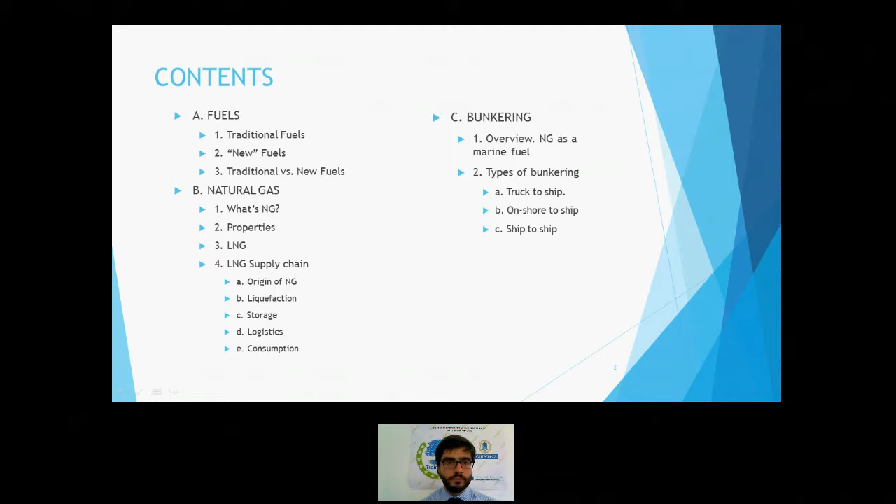Well, the first block is fuels. First of all, what is a fuel? A fuel is a material that has the capacity to store an amount of energy, and this energy can be used for work or as heat energy. It is important because the fuel is the origin of the energy that it stores. It is the reason why electrical energy is not a fuel, because electricity is not the source of the energy, but only the way to transport it.

We can find fuel in various states - they can be solid, liquid, or gaseous. Traditional solid fuels are coal and wood. Liquid fuels are oil derivatives. And the most common gaseous fuels are natural gas or hydrogen.

First of all, a little history about fuels. People began to use fuels basically for heating ourselves and for cooking our food, and the first fuel ever used was wood to make fire. But with the Industrial Revolution and the appearance of the steam engine, coal became the main fuel used for transport and for industrial applications.

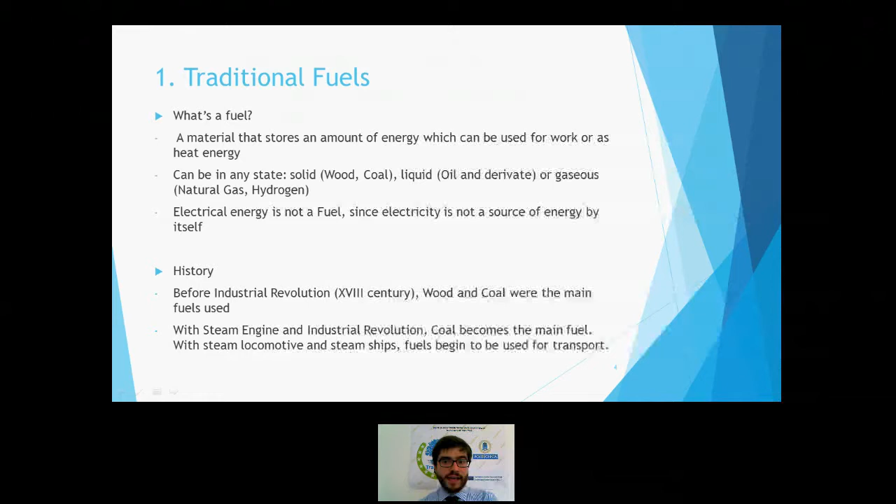The steam engine - with the steam engine appeared the steam locomotive and the steam ships, and this was the way that coal began to be used as a transport fuel. And then, mainly due to its flexibility and the technical development that began to exist, oil-derived fuels were adopted instead of coal for some industrial processes and mainly for transport.

So basically, the way that fuels have followed since the origin to nowadays is shown in these pictures. First, wood for cooking and heating ourselves, then coal in transport, in steam locomotives and steam ships, and finally oil-derived fuels.

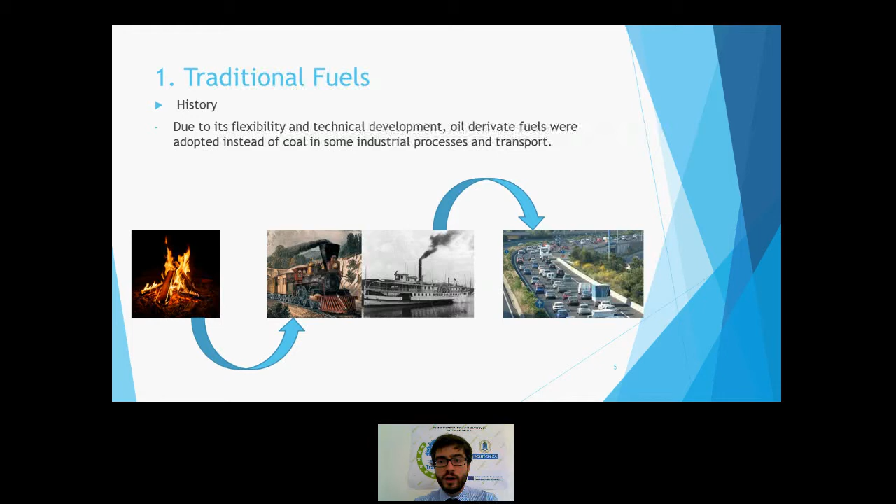Well, first of all, traditional fuels. The main traditional fuels that we know nowadays are diesel, gasoline, and fuel oil. In this table, we can see the energy content, and we can see that there is not a big difference between the most energy powerful and the lowest. Nowadays, these three traditional fuels are the three oil derivatives, and they come from distilling oil.

Its supply, of course, depends on the rate of extraction of oil. In 2014, global consumption of oil was almost 89 million barrels per day, with a proved reserve of 1,700,000 million barrels. It makes a global ratio of reserve production of almost 53 years, meaning that if we keep consuming oil at the rate we have during the last year with the proved reserves we know nowadays, we still have oil for 53 more years.

The main producers are Middle East countries, USA, and Russia, while the main reserves are located in Venezuela, the Middle East, and Canada. Venezuela is the biggest reserve of oil in the world.

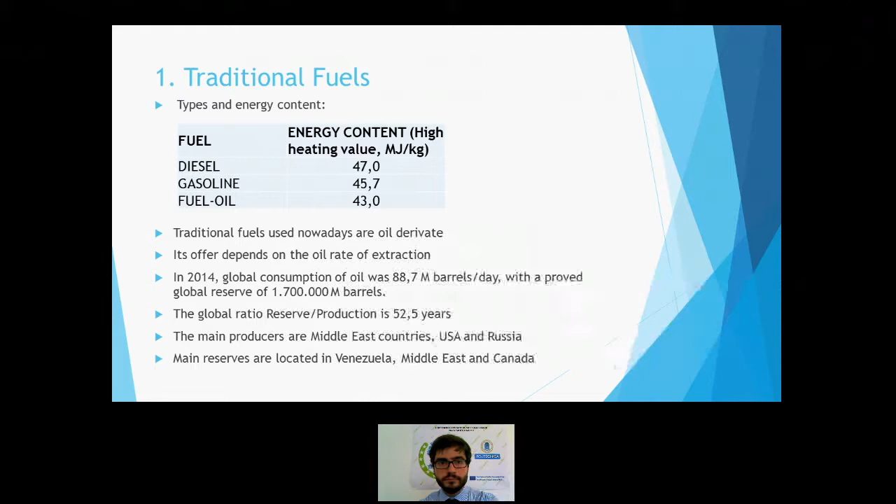And on the other hand, we have new fuel. What's called a new fuel? New fuels are actually not anything new - they have been known for decades. But new fuels are those that nowadays are beginning to be used for transport, mainly for transport. The main purpose of their development is to find cleaner and cheaper fuels, alternatives to the traditional fuels which are diesel, gasoline, and fuel oil.

Well, the types of new fuels we know nowadays. The first one is ethanol, which is produced from plant material. Usually it is used mixed with gasoline, with a mix ratio that varies from 10% to 83%. It reduces dramatically the mixed energy content, and not all gasoline engines tolerate high ethanol rates. So it has some disadvantages.

The second one is biodiesel. It is produced from vegetable oils and animal fats. It can be used by itself or mixed with diesel, and not all diesel engines tolerate high biodiesel rates, as happened with ethanol. The third is natural gas.

Natural gas, as I said before, is not actually new, but it is beginning to be used nowadays for transport. It comes from wells. One of the main advantages is that it reduces dramatically the air pollution rates. Diesel or gasoline engines can be adapted to natural gas, but they can also keep using their original fuel, and prices are lower than diesel and gasoline - another important advantage.

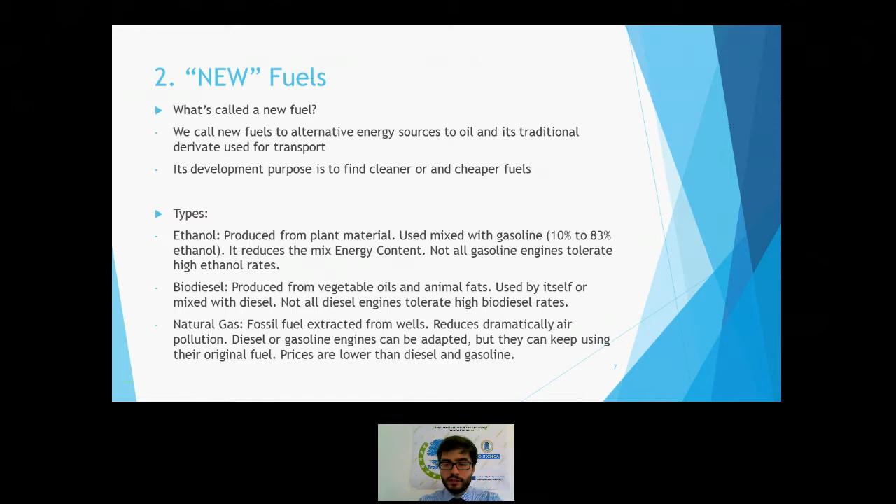The last one is LPG. It is also an oil derivative, but it hasn't been used for years for transport, so it is considered also a new fuel. It reduces some harmful emissions, not as much as natural gas does, but it still reduces some. Its price is lower than diesel, which is its main advantage.

In this table, we can see the energy content of every new fuel. Ethanol has a lower energy content than the other three, while the other three are more or less similar, though not the same—the difference between the most and the least is about 20%.

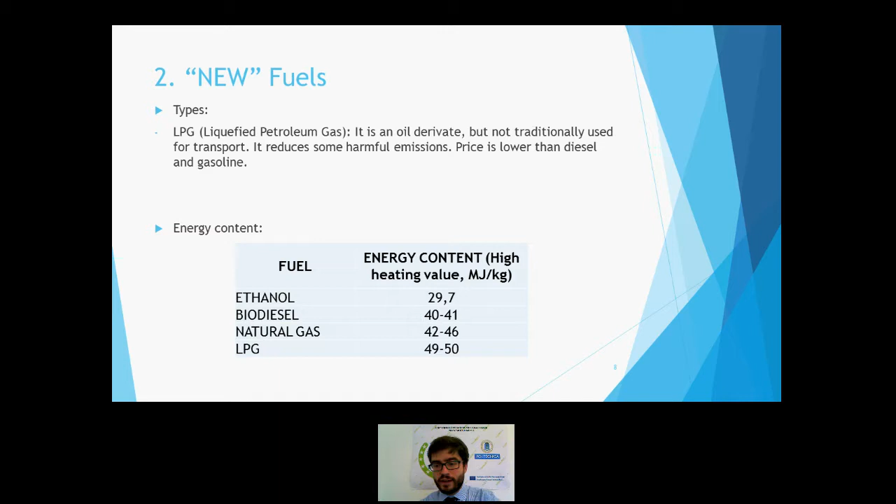Biofuel production, including bioethanol and biodiesel, in 2014 was almost 71 million tons of oil equivalent, while oil production in the same year was 4,220 million tons. That makes bio-oil production only 1.68% compared with oil production. It's not really representative nowadays.

Gas production in the same year was 3,127 million tons, and its reserve-to-production ratio is 187 years. This is important because it means that, keeping our consumption ratio, we still have 187 years of gas, which compared to oil's ratio of around 52.5 years, is much higher.

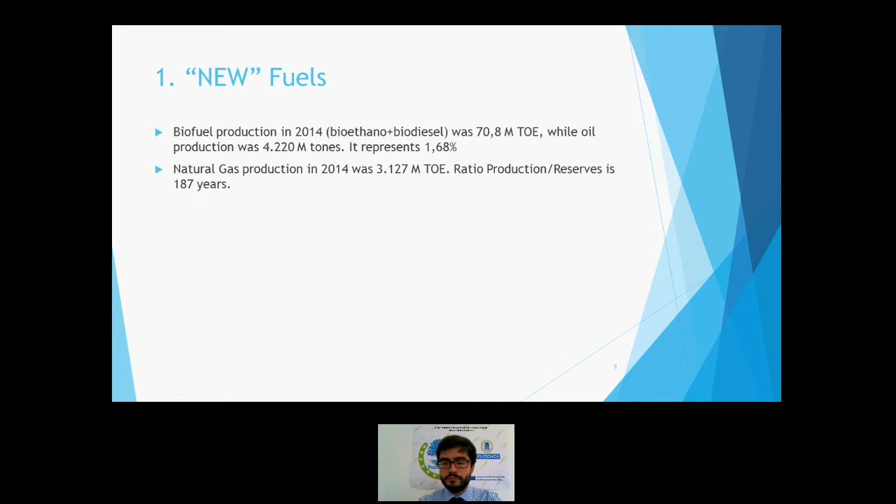Comparing new fuels versus traditional fuels, there are advantages and disadvantages to each type. On one hand, traditional fuels have technology that is already developed, which is an important advantage. There are lots of engines, cars, and truck models that some brands offer nowadays at really competitive prices. Another advantage is their versatility and supply.

There are lots of supply points where we can fuel our diesel or gasoline car. However, the disadvantages are that pollution levels are generally higher than new fuels, costs are beginning to increase and are usually higher than new fuels, and reserves are low and getting lower every year.

On the other hand, we have new fuels, which are generally cleaner. Their pollution levels are lower, their prices are generally also lower, and the reserves we still have of these fuels are larger, bigger. Some of them are actually renewable.

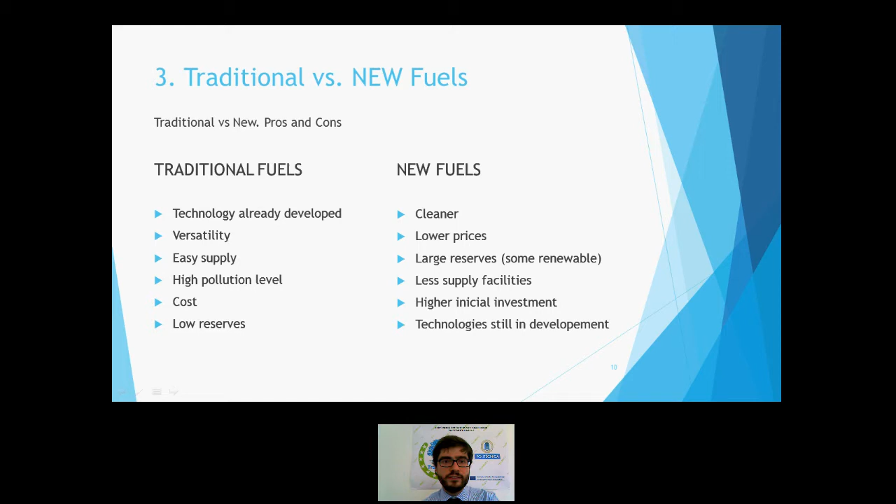Let's study a case where we compare a traditional diesel-fueled truck with an LNG natural gas fuel truck by Iveco, the Iveco Stralis. The assumptions for the case study are as follows: the diesel cost is €1.08 per liter.

That's the diesel cost of nowadays. The LNG cost will be 78 cents per kilo. The initial investment will be €21,000, which is the real investment. Let's assume that this truck will travel 120,000 kilometers per year.

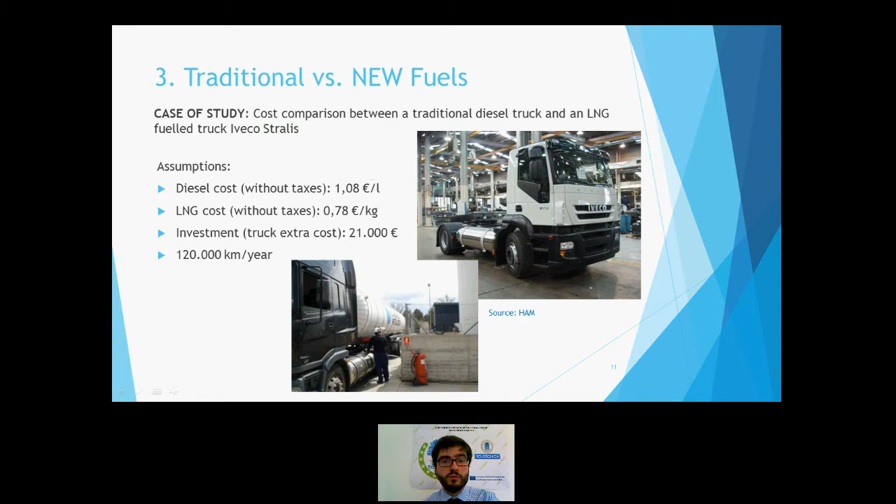Well, with these assumptions, we see that the savings every year are almost 16,000 euros, and the period of amortization is less than 1.5 years. This is important because it means it's really a good investment to use LNG trucks, and that's why nowadays there are lots of companies planning to switch their fuel from diesel to LNG.

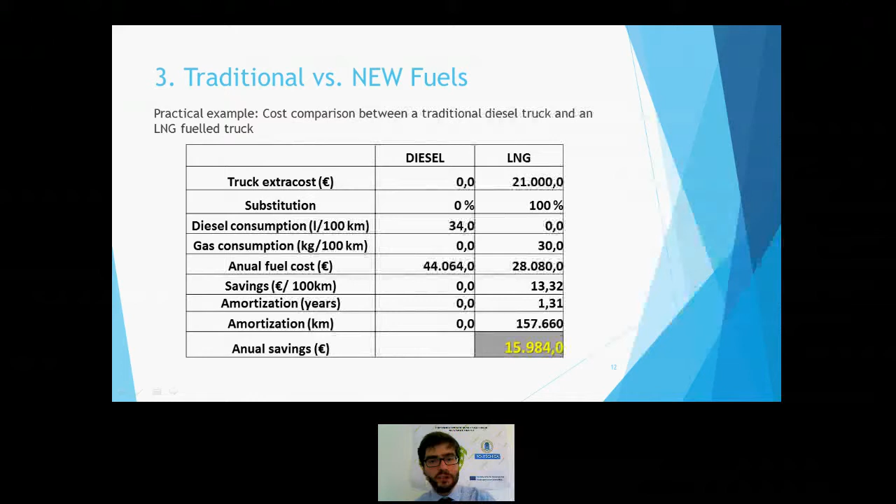Now let's talk a little about natural gas in general. First of all, what is natural gas? Natural gas is not actually a single gas—it is a mix of different gases whose principal component is methane. Its composition depends basically on the country of origin of the natural gas.

In this table we have three different examples: the first is from Algeria, the second is from Libya, and the third is from Qatar. These data are taken from Sedigas, and we can see how the composition of natural gas varies from one well to another. Basically, methane makes up at least 83% to 87% of the composition, while ethane, propane, butane, and other heavy hydrocarbons make up less than 10-12%.

There is also a small quantity of nitrogen, and its energy content in megajoules per kilo, while not exactly the same, is quite similar depending on the well it comes from.

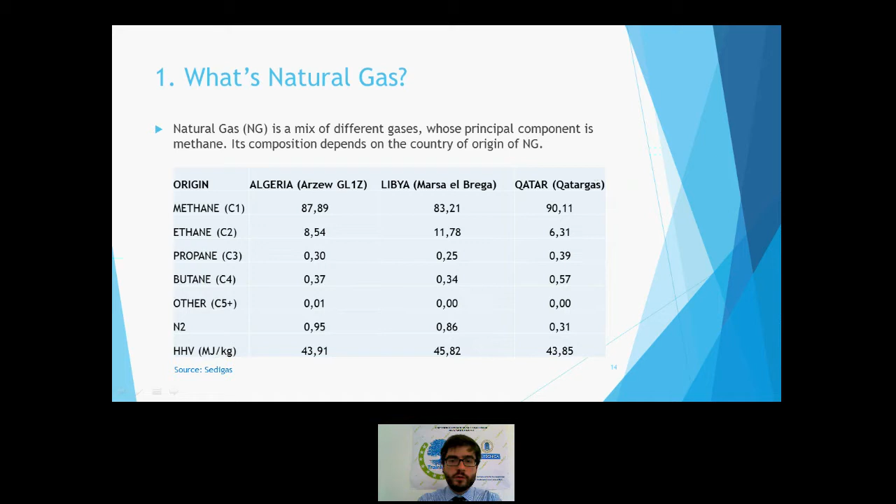Natural gas is extracted from wells, and originally it is found in gaseous state. Transport of the gas can be performed by pipeline in gaseous state, or by ship and trucks, but in that case it must be in liquid state. At normal conditions, which is considered 0 degrees and 1 atmosphere of pressure, natural gas is found in gaseous state. This is more or less the conditions in which it is found in nature.

But it can be liquefied by chilling it down to cryogenic temperatures, which means going to more or less minus 160 degrees at 1 atmosphere. At this pressure of 1 atmosphere, liquefied natural gas specific volume is approximately 600 times smaller than gaseous natural gas. This is so important, and this is the main reason why it is so interesting to liquefy natural gas.

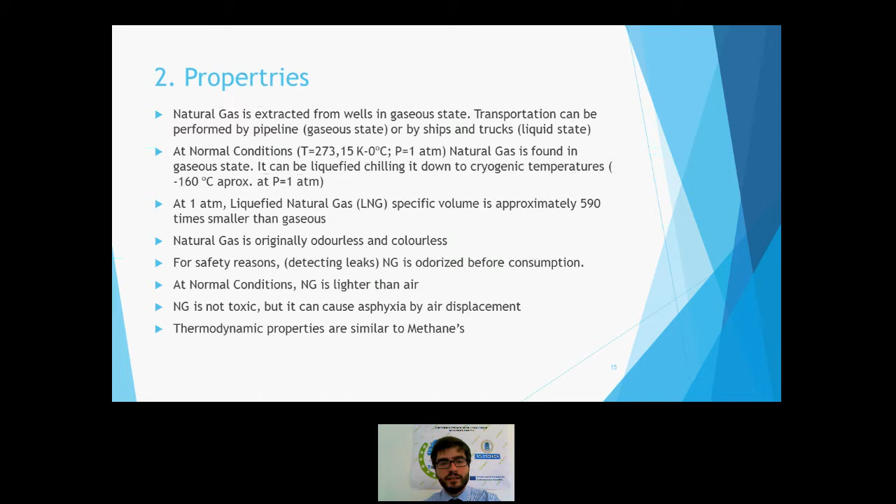Originally, natural gas is odorless and colorless, but for safety reasons, basically for detecting leaks, natural gas is odorized before consumption. At normal conditions, natural gas is lighter than air. It is not toxic, but being not toxic, it can cause asphyxia by air displacement, taking the place that air took. Its thermodynamic properties are similar to methane, so when we have to make calculations about the processes of natural gas, we usually take methane's properties.

Then we have LNG, which is nothing more than liquefied natural gas. Basically the material is the same, but it's liquefied, so it changes its state. Why do we liquefy natural gas? Basically because the density, as I said before, is approximately 600 times higher than natural gas, so it is the only economical way to transport it large distances in ships or trucks. LNG also permits storing large amounts of energy in limited space. In 2014, one third of the international natural gas trading was made by LNG.

LNG properties as a fuel are the same as natural gas, but it is a liquid, so it is an odorless and transparent liquid. Its temperature generally varies from minus 160 to minus 100 at normal operating pressures. Its approximate density is 450 kilos per cubic meter, but it also depends on the temperature and its composition. LNG vaporizes at atmospheric conditions.

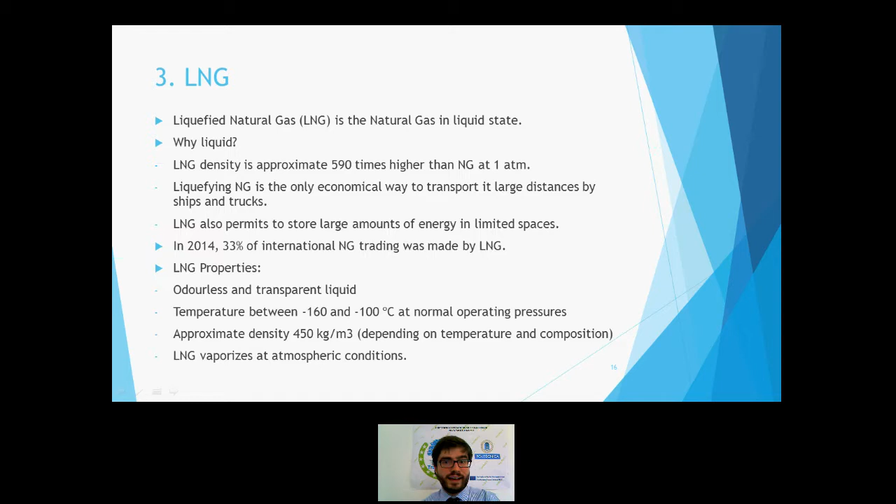LNG combustion, like natural gas, is cleaner than oil derivatives. It generates a minimum amount of sulfur dioxide and nitrous oxides, and carbon dioxide emissions are also smaller than oil-derived fuels, more or less 20 and 10 percent lower.

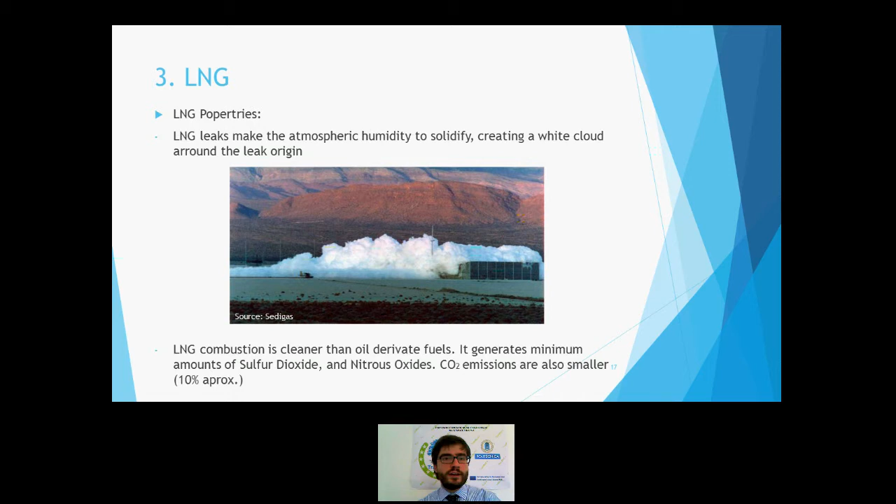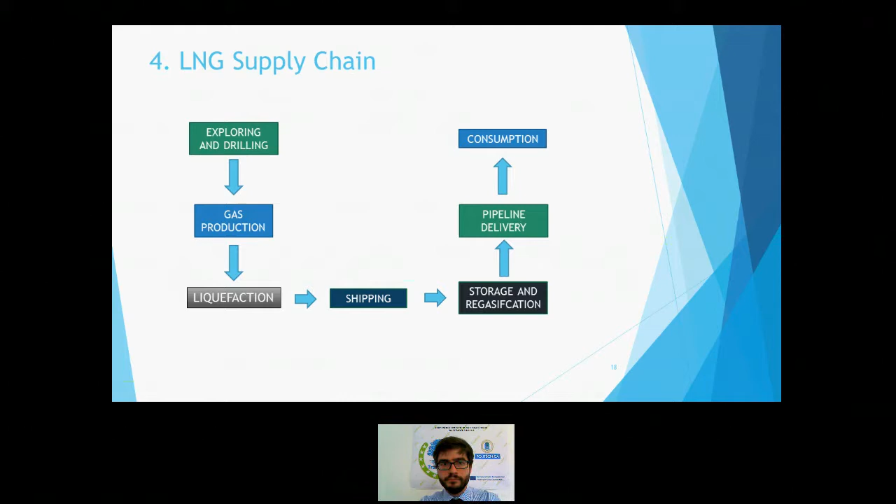As we said before, natural gas is extracted from wells. These wells can contain only gas, or they can also contain oil. When the well from which the natural gas comes also contains oil, we say that it is associated natural gas, and this well is called an associated well. When the well contains only gas, we call this gas unassociated natural gas.

Depending basically on logistic and technical conditions - the location of the well, the complete amount of gas located in it, the availability of treatment facilities, and other conditions - natural gas from associated and unassociated wells can be or not economically used. Where it cannot be economically used, sometimes it's burned off in flares in the same field, and sometimes it is reinjected, waiting for conditions to change, basically waiting for the price to become higher.

Natural gas extracted sometimes contains significant quantities of heavy hydrocarbons, and they are almost always removed from the natural gas for two reasons. The first is economical, because the price of heavy hydrocarbons is higher than natural gas, so it's money. The second is technical: the natural gas liquefaction process does not tolerate high rates of heavy hydrocarbons, so it must be removed if we want to liquefy.

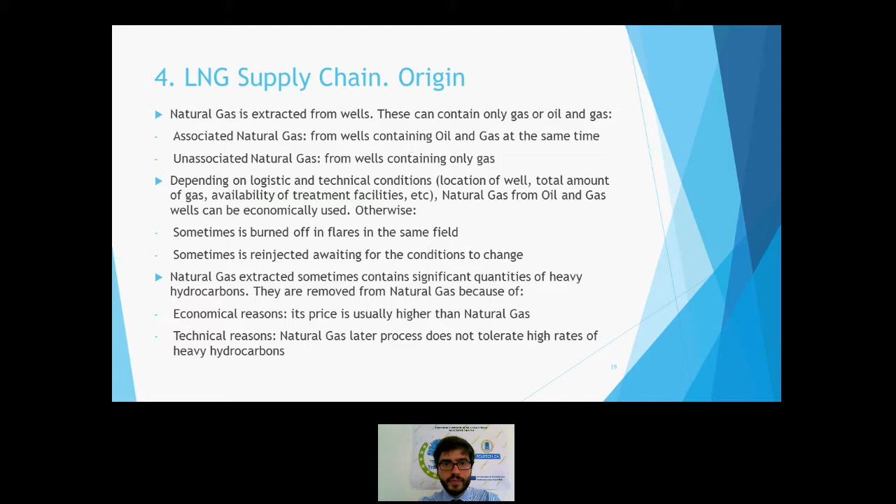When natural gas is transported by pipelines, it must be compressed and sent almost directly to its consumption points. But when natural gas is destined for the LNG market, it's liquefied in a liquefaction plant.

This plant is the place where the gas is liquefied. Its basic parts are the pretreatment, liquefaction system, storage, a loading facility, and generally a power generation plant. There can also be other systems in the same plant, such as cooling water systems, nitrogen production, water treatment, or other auxiliary systems.

The first step, pretreatment, has the objective to remove different things. The first is solid particles, and they are removed because they can cause damage to the plant equipment and to the consumption devices.

The second is mercury, and it is removed because it causes damage to aluminum-made equipment. Then heavy hydrocarbons, if they have not been previously removed, as we said before.

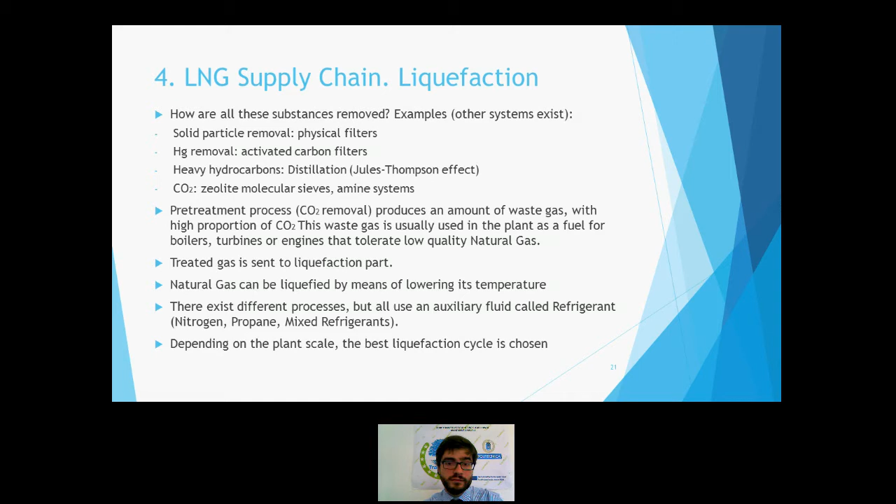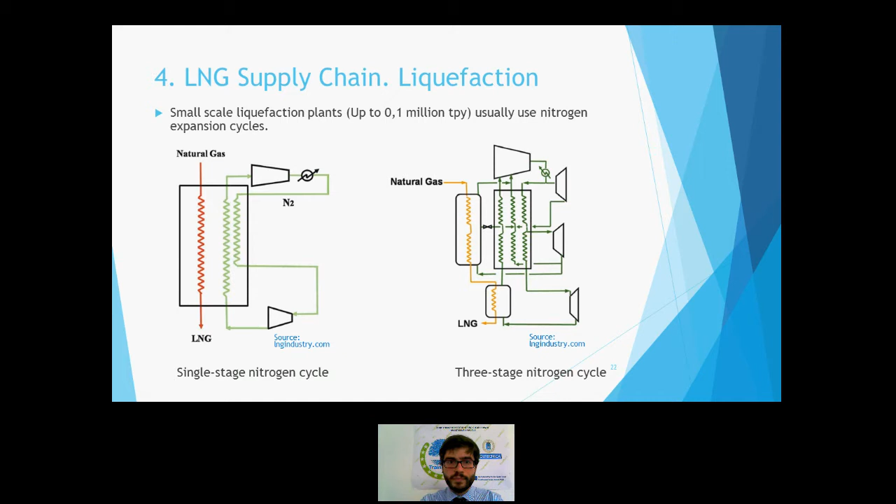Basically, nitrogen is compressed, then it is cooled, and finally expanded, so we dramatically drop its temperature. Then heat is exchanged between the natural gas and the cold nitrogen inside the cold box.

This is how the natural gas is liquefied. As I said before, this compression and expansion of nitrogen can happen in a single stage or in consecutive stages.

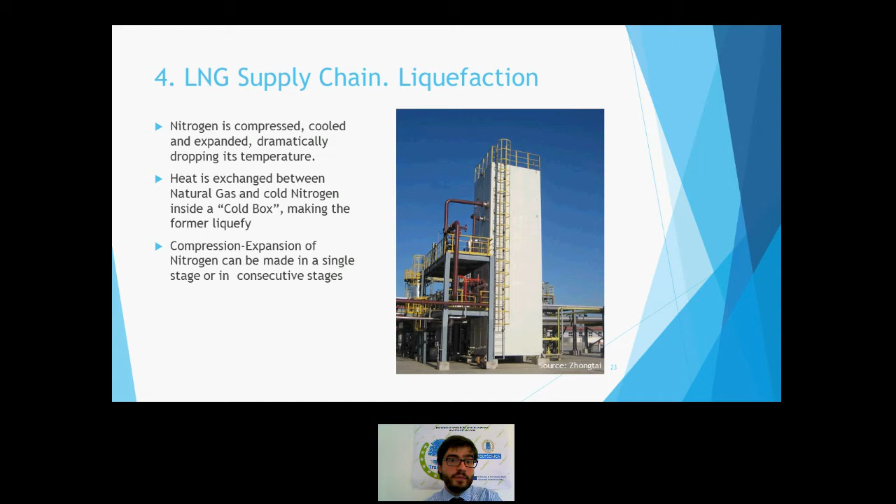The main advantages that these nitrogen cycles offer to owners of plants is that there is only one refrigerant, which makes it simple, and this refrigerant fluid is inert and cheap. Nitrogen can also be easily self-distilled where it is not commercially available, and it is also used in other parts of the plant for other purposes, basically for inertization.

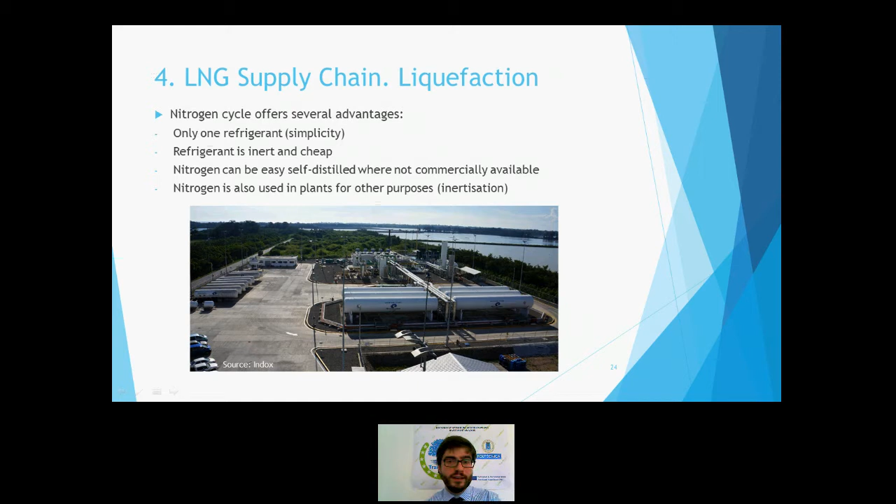On the other hand, large liquefaction plants, 1 million tons per year and bigger, usually use the cascade liquefaction cycle, which implies using more than one refrigerant and more than one stage.

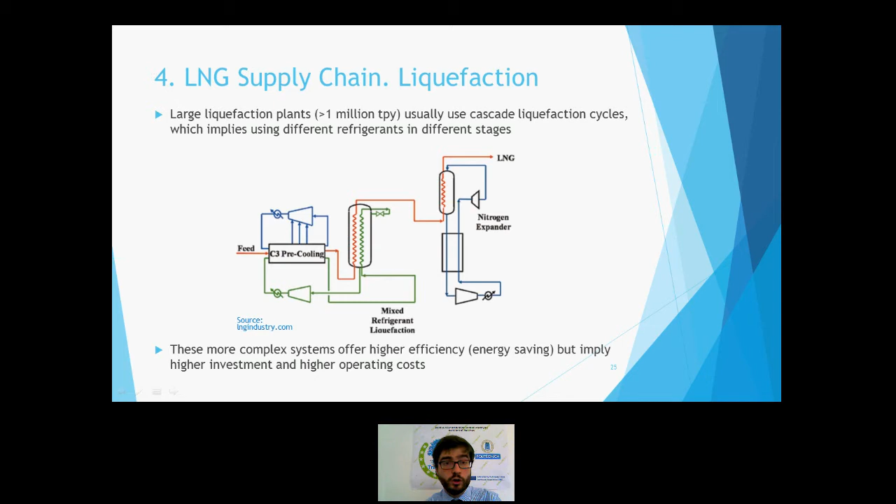Once it's been liquefied, natural gas must be stored before being transported to the consumption points. This storage step must be performed while conserving the LNG under its equilibrium point, so heating must be avoided to prevent boil-off.

The LNG heating is prevented by means of insulation. Basically, tanks and pipes are insulated from the medium, either by covering them with polyurethane foam or by creating a vacuum chamber between them and the medium.

On one hand, polyurethane offers easy performance, versatility, and low cost, but less thermal efficiency. Vacuum insulation is technically more complex than polyurethane insulation, and there is little experience in general performing this kind of insulation. Its cost is higher, but its thermal efficiency is so high.

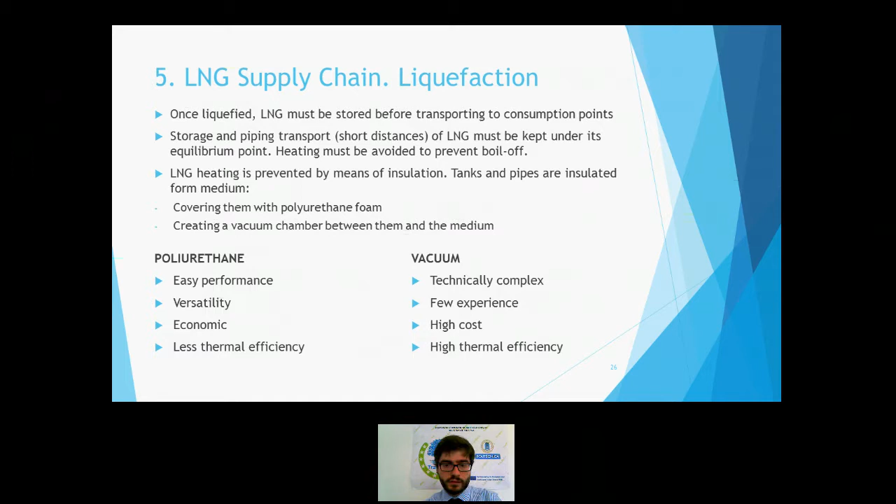Storage is basically performed in cryogenic tanks, which can be pressure tanks or atmospheric tanks. The first kind, pressure tanks, usually cover the range up to 200 cubic meters, and they are almost always vacuum insulated.

They are manufactured at a shop, which means quick assembling on site. Their pressure varies from 5 to 20 bars, basically, which is so useful for some users, implying no need of pumps in some applications. They are used only in small-scale liquefaction plants.

On the other hand, we have atmospheric tanks, which cover the range from 500 cubic meters. They are insulated basically with perlite and foam glass, and they are constructed on site, which implies a longer term of construction.

Its pressures are usually below 0.5 bars, and usually they are used in medium or large scale liquefaction plants and storage and regasification plants.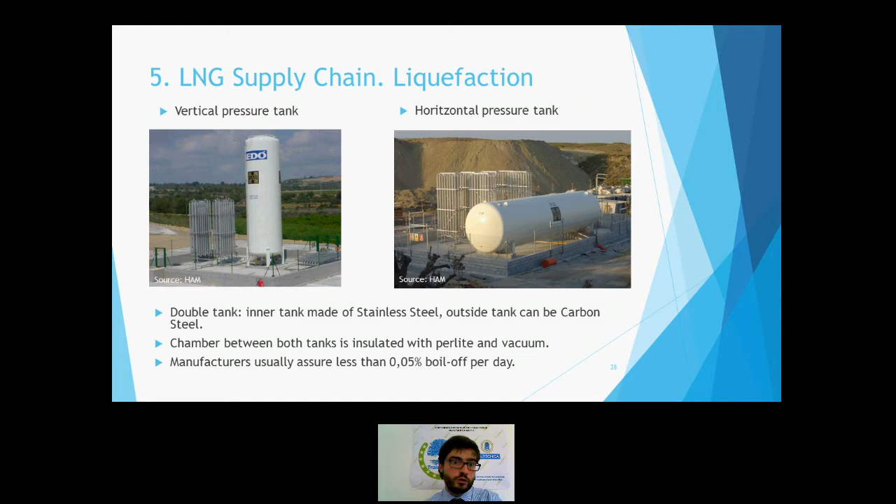And on the other hand, atmospheric tanks also have a double tank. The inner tank is always made of stainless steel, while the outside tank can be made of carbon steel or reinforced concrete. Generally, the bigger ones are made of reinforced concrete, while medium tanks are made of carbon steel. The chamber between both tanks is thicker than in pressure tanks, but it is not vacuum insulated. It is insulated with perlite only, and the bottom and deck are usually insulated with foamglass.

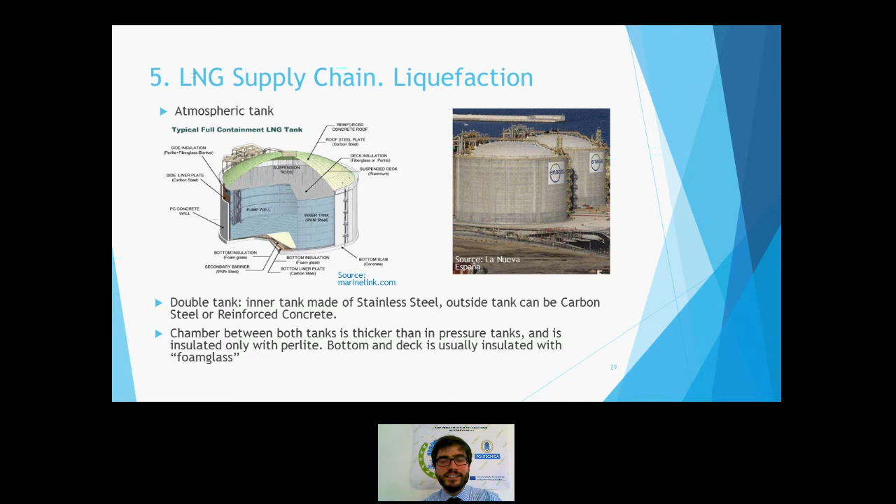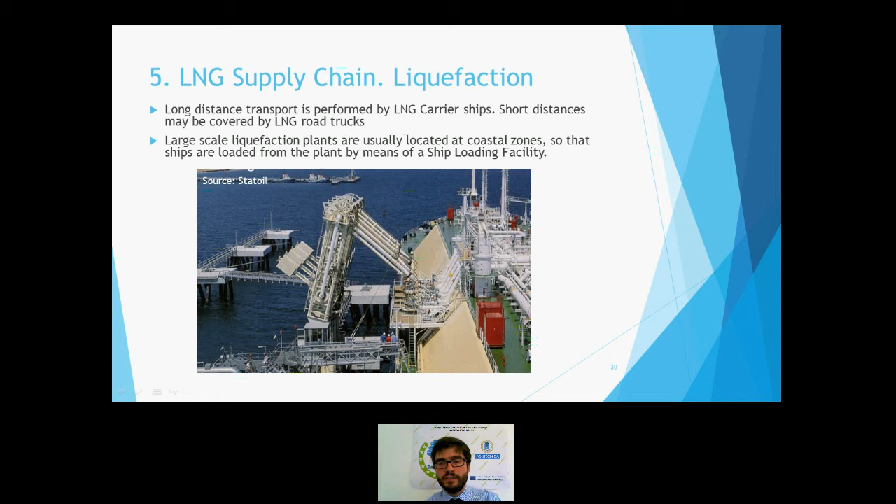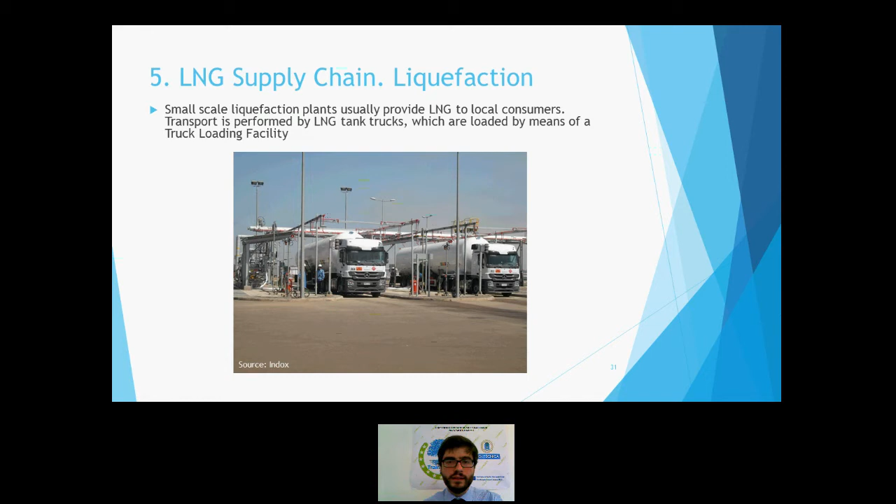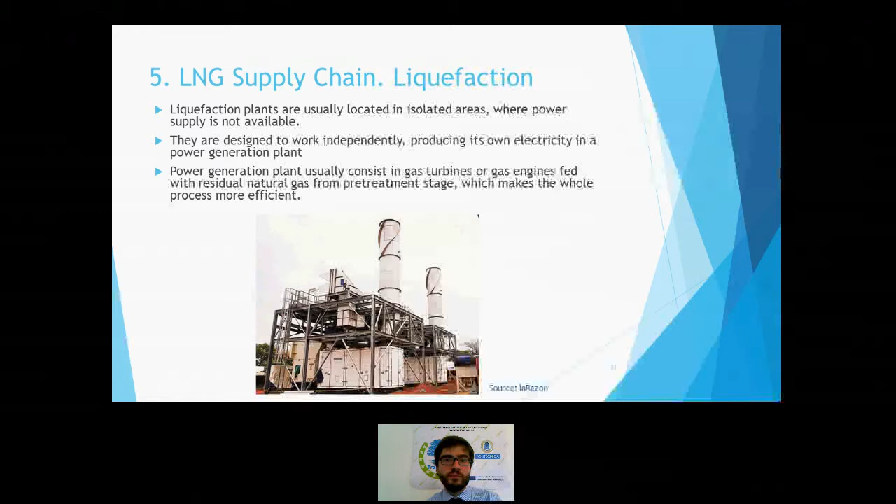Long distance transport of LNG is performed basically by means of LNG carrier vessels, whose capacity usually is up to 260,000 cubic meters. There exist different designs for these carrier vessels, but they all can be classified into two big groups. The first is the self-supporting tank system, which consists of a ship containing a series of spherical or prismatic tanks that are insulated and supported by the structure of the ship, but are independent of the vessel hull.

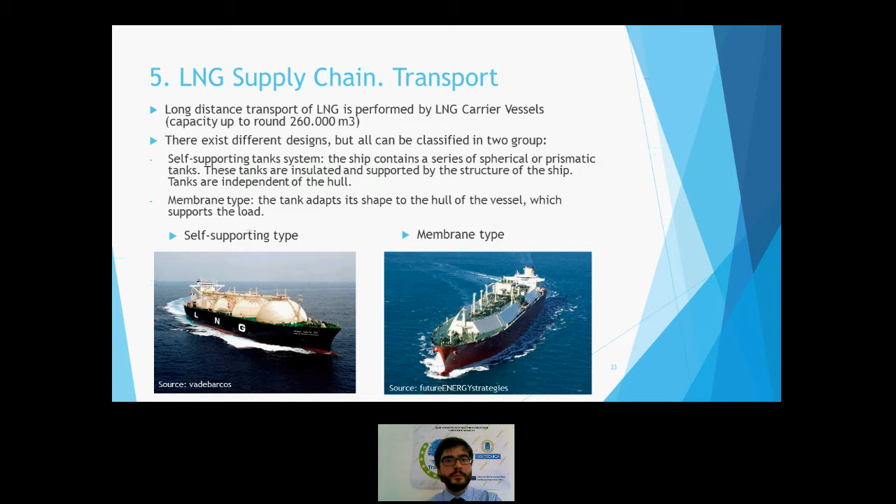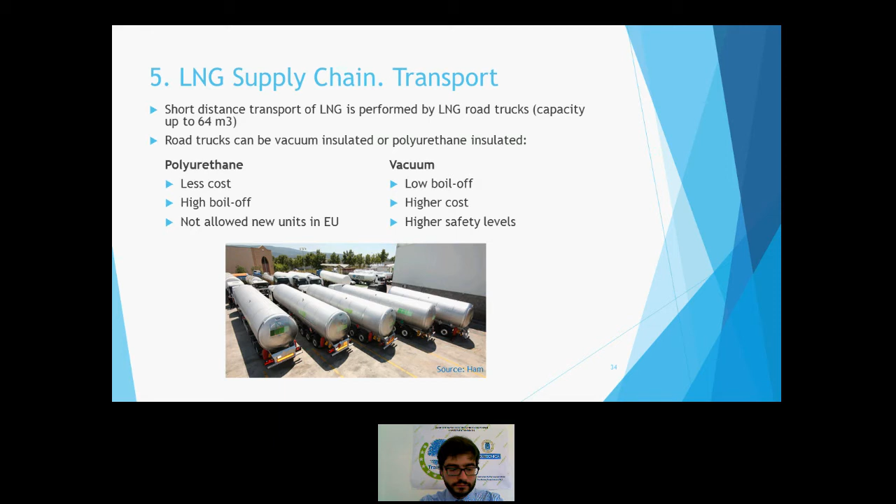The step once the LNG has been transported is regasification. So LNG vessels are received at storage or regasification plants, which are located basically in importer countries. Regasification plants receive, store, and regasify LNG, and natural gas, once it's in gas state again, is transported by pipeline to its final consumer. Part of the LNG received at the regasification plant is sold in liquid state and transported by LNG road trucks again.

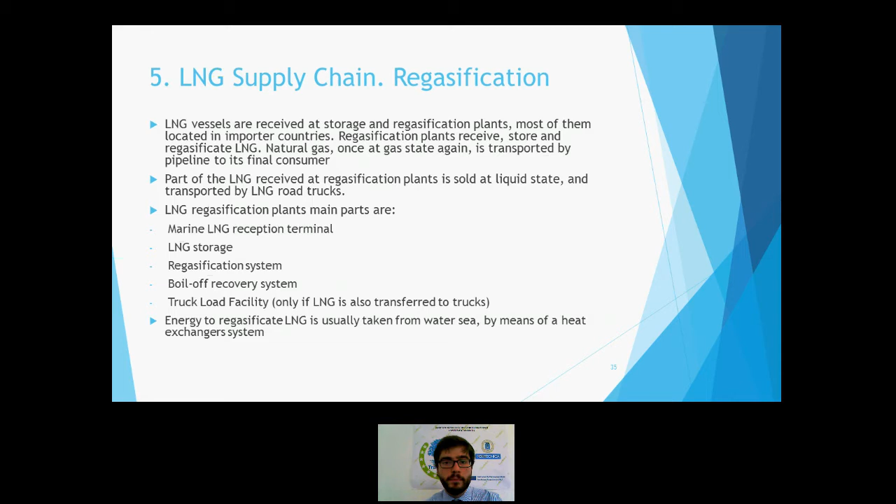In an LNG regasification plant, its main parts are the reception terminal of the LNG, the storage devices, which are basically atmospheric tanks, the regasification system, a boil-off recovery system, and if part of the LNG is sold or transferred to trucks, a truck loading facility. Energy needed for regasification of the LNG is usually taken from sea water by means of a heat exchanger system. And in this picture, we can see a regasification plant whose most characteristic feature is its big atmospheric tank.

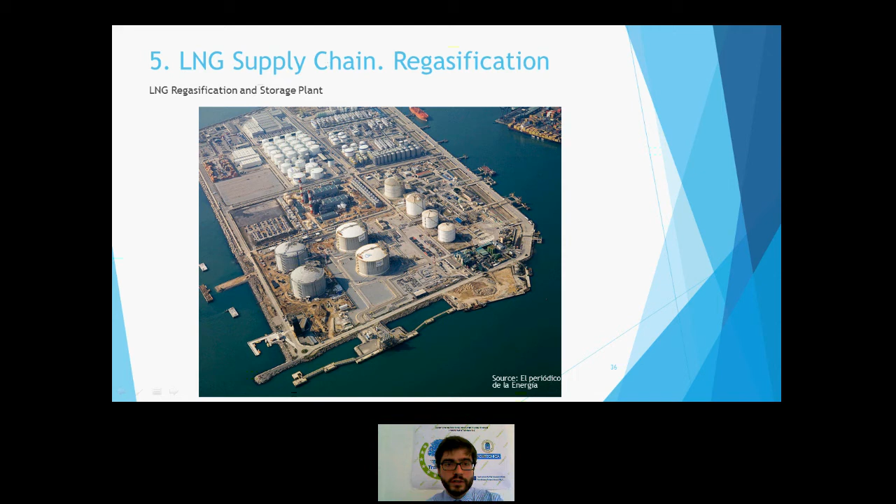And here we can see the European LNG system, storage and regasification system. In green color, we see the existing facilities, while in red we can see those that are under construction or committed right now, and in yellow we see those that are still planning or under study.

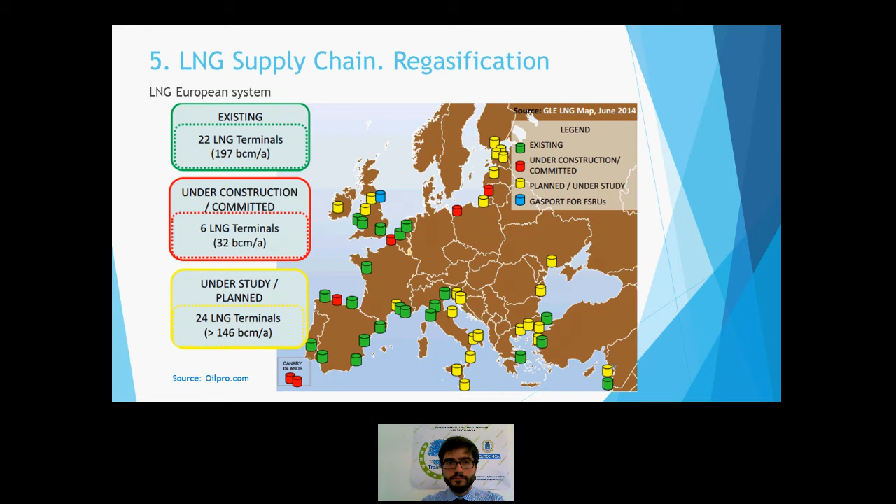This was for LNG which was transported by vessel, but the LNG that is transported in road trucks is employed basically in satellite regasification plants or other small-scale consumption facilities. An LNG satellite regasification plant is basically a small facility whose purpose is regasifying LNG to feed small-scale consumption points. Generally, satellite plants feed industries or isolated population centers not covered by pipeline.

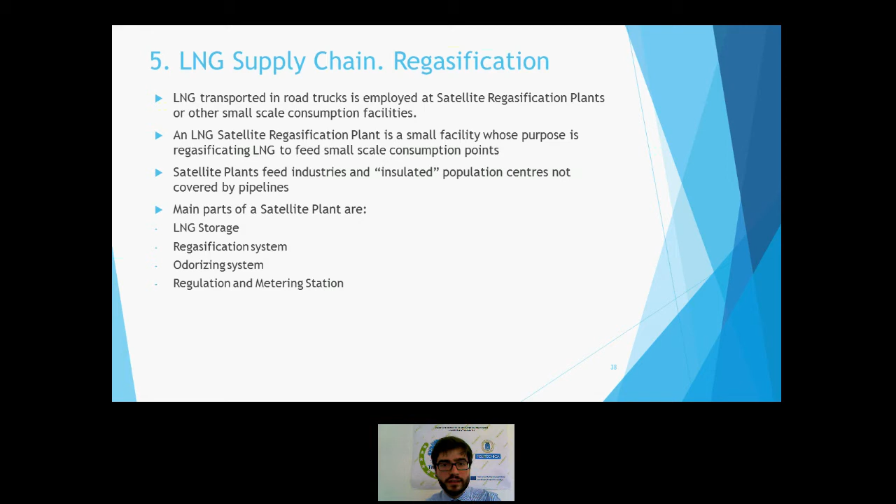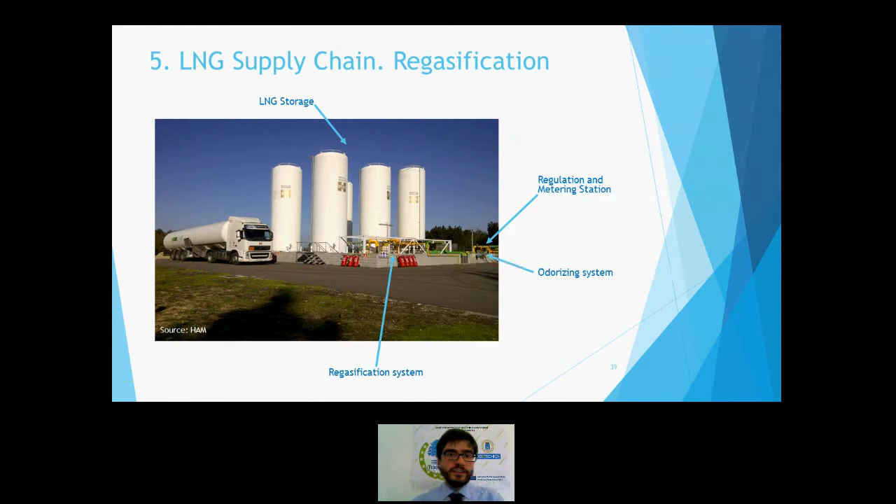The storage of the LNG at satellite plants is performed basically by pressure vertical or horizontal vacuum insulated tanks. The number and capacity of these tanks depend basically on several factors. The first is the average consumption. The second is the presence or not of consumption peaks, and the supply warranty that we need. And the type of tanks, vertical or horizontal, depends basically on space possibilities, because horizontal tanks need more space.

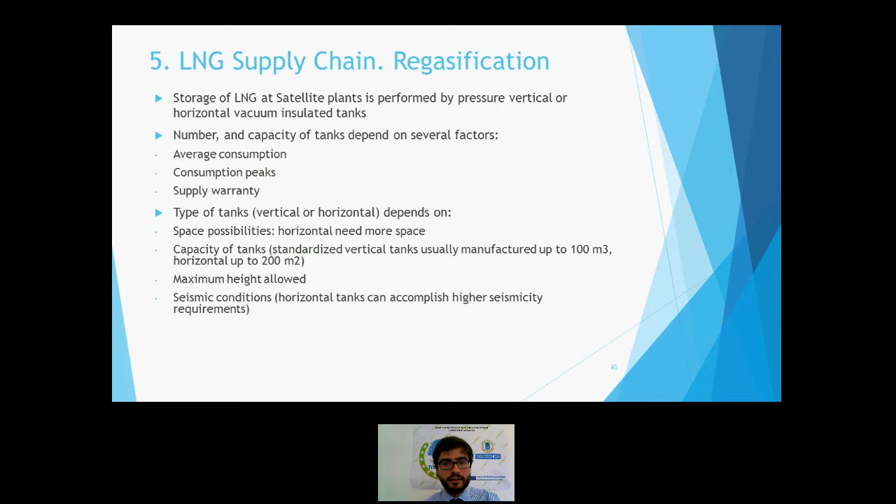The capacity of the tanks, because standard vertical tanks are usually manufactured up to 100 cubic meters, while horizontal tanks are up to 200 cubic meters. It also depends on the maximum height allowed by the legislation, and it depends also on the seismic condition, because horizontal tanks can accomplish higher seismicity requirements than vertical tanks. In these two pictures, we can see two different satellite regasification plants. In the first, there are vertical pressure tanks, while in the second one there are horizontal tanks.

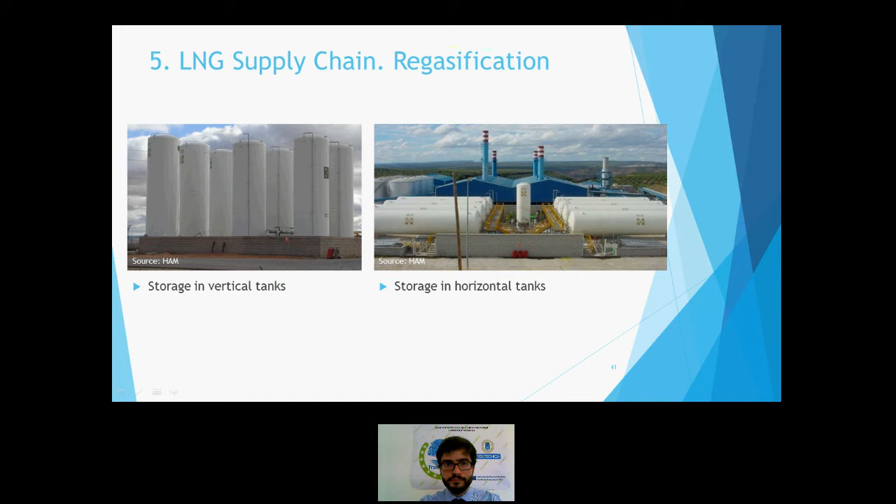As we said before, to regasify LNG, we need to heat LNG beyond its boiling temperature, and natural gas to be employed successfully must be supplied at a minimum temperature of 0 degrees. So the regasification system needs to transfer enough energy to LNG to regasify the natural gas up to its consumption temperature, which is more or less 0.26 kilowatt-hours per kilo of gas.

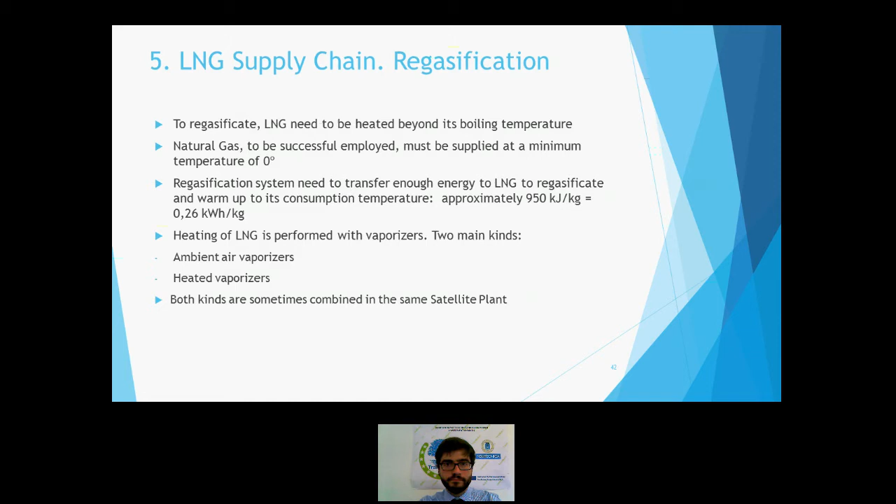The heating of LNG is always performed with vaporizers. There are two main kinds. The first kind is ambient air vaporizers, while the second one is heated vaporizers. And both kinds are sometimes combined in the same plant. The first kind, ambient air vaporizer, is a simple device consisting basically of a finned tube which enlarges the area of heat transmission. And LNG interchanges energy with ambient air in this device.

They do not need any heat source but ambient air. They are usually installed in groups which work in turns. While one group is vaporizing the LNG, the other one is regenerating itself. They are very easy to install and operate, but they need dry ambient air because humidity makes them saturate quickly. And sometimes they are installed combined with reheaters. First, LNG regasifies in ambient vaporizers, and then reheaters, which can be electrical heaters or hot water reheaters, make it reach its minimum consumption temperature.

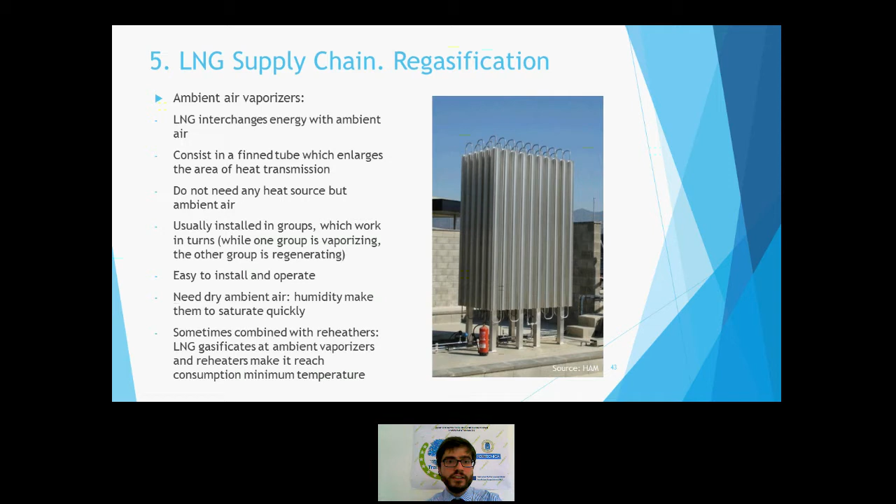The second kind, the heated vaporizers. In them, LNG interchanges its energy with an auxiliary fluid, which is heated by an energy source. The most common type consists of a tube heat exchanger where LNG is heated by glycol water. They need a heat source, which is usually gas boilers or sometimes residual energy of an industrial process. One of its main advantages is that it can work continuously and does not depend on any special ambient condition, but they need a more complex control system. Its price is more or less the same.

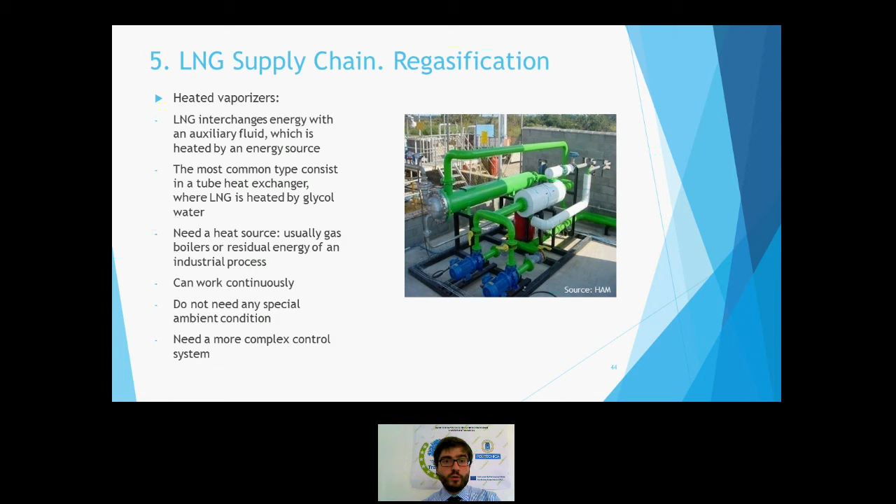Once the gas has been regasified, it must be odorized. Odorizing is performed basically for safety reasons, because natural gas is odorless and colorless, so it is difficult to detect leaks. The way to odorize it is adding to it some THT. THT is a gas that has an intense odor, which makes natural gas leaks easy to identify without any special device.

And before being sent to consumption, natural gas must be pressure regulated. Pressure must be regulated, and flow must be measured in a regulation and metering station. Here in the picture, we can see a skid, which includes the regulation and metering station and the odorization system.

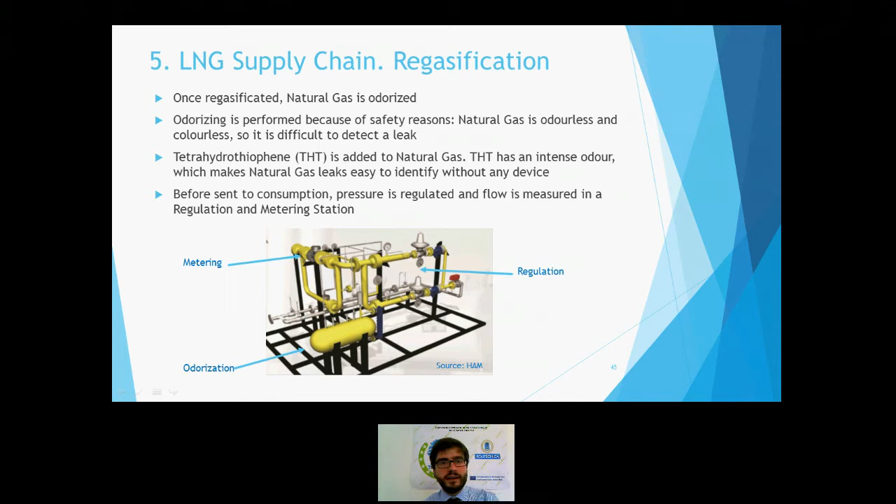Natural gas can also be consumed as a fuel for explosion engines, as we saw at the beginning. And the way to supply the explosion engines with fuel is a natural gas fuel station, which basically consists of vertical or horizontal pressure tanks, pumps, vaporizers, compressed natural gas bottles, LNG dispensers, and compressed natural gas dispensers.

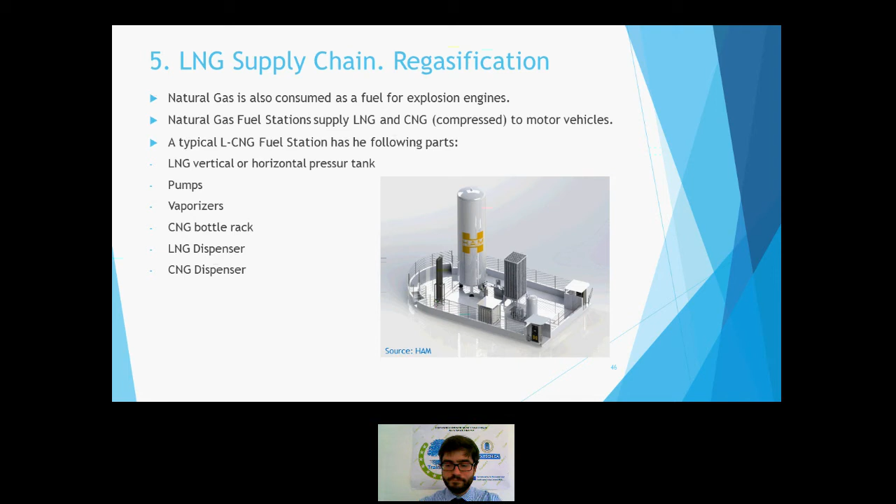And now our third block will be bunkering. Well, first of all, what is bunkering? Bunkering is the common name given to all the operations whose object is refueling a vessel. Traditionally, marine fuels are oil-derived fuels, but with new legislation and the creation of ECAs, which are emission control areas, ship owners have been forced to find cleaner fuels to lower the emissions of their ships.

LNG basically offers vessel operators an alternative to traditional fuels with which to accomplish the new regulatory requirements, basically low emission rates, and it is also economically competitive. Another advantage is that LNG ship engine technology is already developed, because LNG cargo vessels have been fueled for years with the boil-off recovered from their tanks.

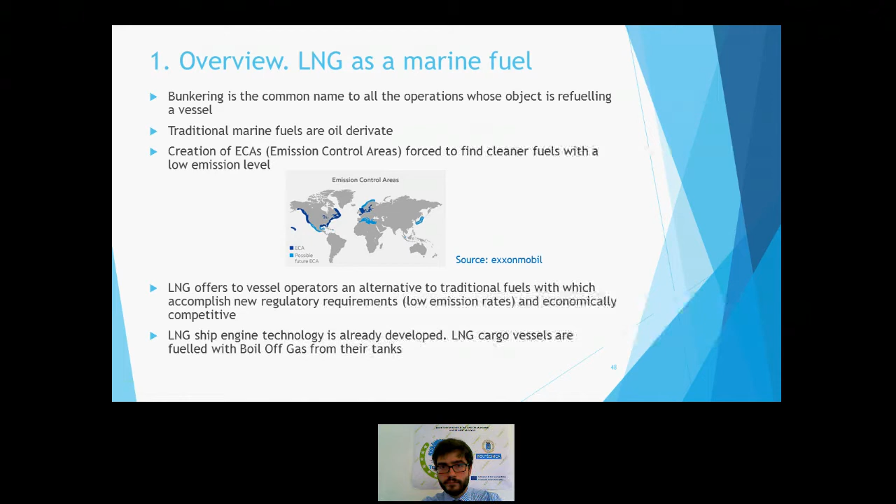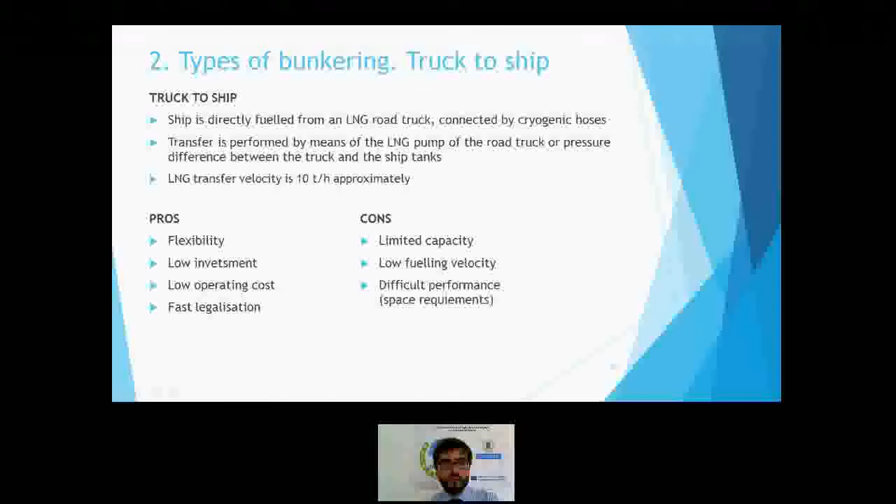There are different ways to perform LNG bunkering. The first is truck to ship, and then we will see onshore to ship and ship to ship ways to perform it. Truck to ship is the way to fuel LNG vessels where the ship is directly fueled from an LNG road truck connected by cryogenic hoses. The transfer is performed by means of the LNG pump of the road truck, or by means of the pressure difference between the truck and the ship tanks. And the transfer velocity is basically around 10 tons per hour.

Its main pros are that it is a flexible system, it does not require a high investment, the operational costs are also low, and they do not need anything special. However, its capacity is limited, as we said, its transfer velocity is low, and sometimes its performance is difficult because it requires a great deal of space onshore on the docks.

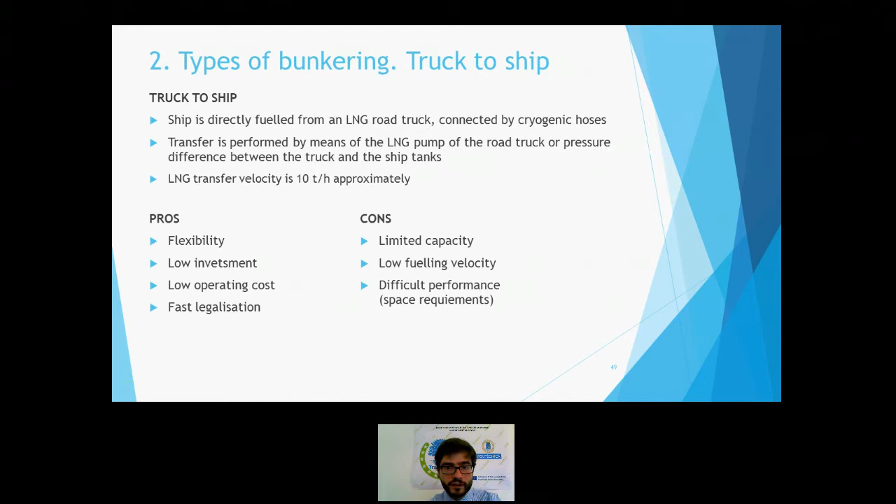And let's see now a practical case of a ship that was fueled by a truck-to-ship bunkering system. The ship was a ferry called F.A. Gauthier, which is property of the Société des Traversiers du Québec. It was the first LNG-fueled ship constructed in Italy, in 2014. Its main features are 133.2 meters long, 22.4 meters of beam. Its capacity is 800 people and 180 vehicles.

Its main engines were Wärtsilä. The total power of the engine system is 20,880 kilowatts. Its velocity is 20 knots, and it has a 250 cubic meter capacity LNG tank.

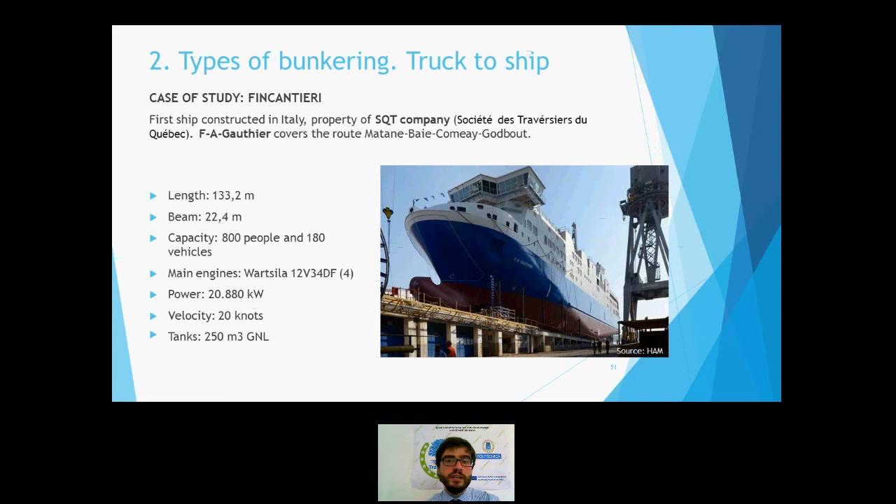It was fueled employing the truck-to-ship system during the test period in Italy. The LNG was brought from the regasification plant that Enagás has at Barcelona, which implied 1,600 kilometers from the Enagás terminal to the shipyard. 7 road trucks were necessary to supply this LNG during the test. The transfer was made by means of a 30 meter hose, and LNG was transferred by means of the pressure difference between the truck and the LNG tank.

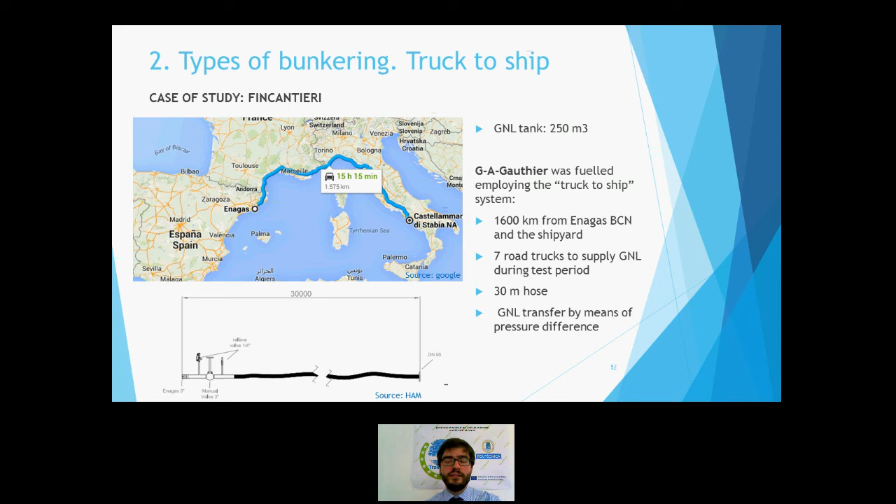Well, the second way to perform LNG bunkering is onshore to ship. When it is performed, the ship is fueled directly from an onshore facility set in a fixed point. It is sometimes useful because bunkering can be performed regularly from a fixed point, and it is also useful when storage plants are located far from the bunkering points, because it provides a secondary storage facility. And the LNG transfer velocity is more or less up to 100 tons per hour, which is, if I am not mistaken, 10 times the velocity of truck to ship.

Its main feature is that the LNG is stored in atmospheric pressure tanks. In the facility there are cryogenic pumps, and the transfer of the LNG from these tanks to the ship is performed by means of flexible hoses or loading arms.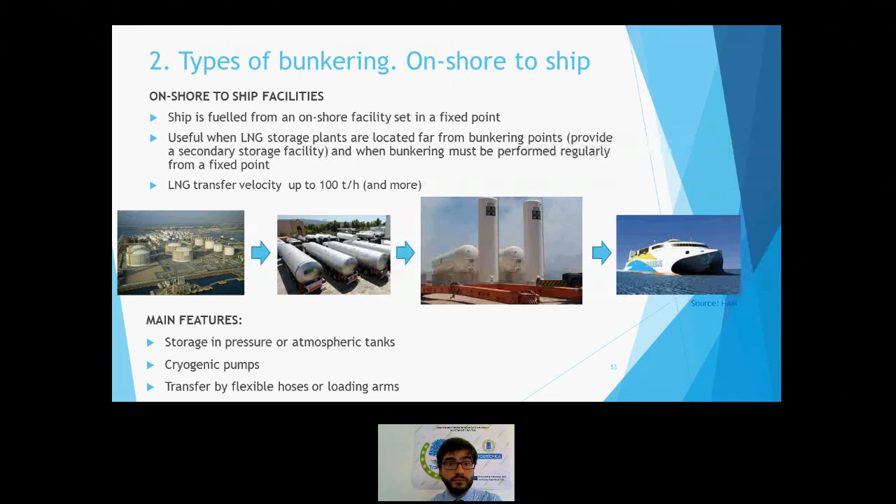They are usually designed in modules. The first module is the storage module, consisting in different tanks. Basically, they can be vertical or horizontal. They can also be pressure or atmospheric, so they tolerate all kinds of tanks, whose usual size is from 60 to 1,000 cubic meters, but they can be larger if needed.

And the loading of the facility tanks can be performed from trucks, either employing the truck pumps or static pumps located at the bunkering facility.

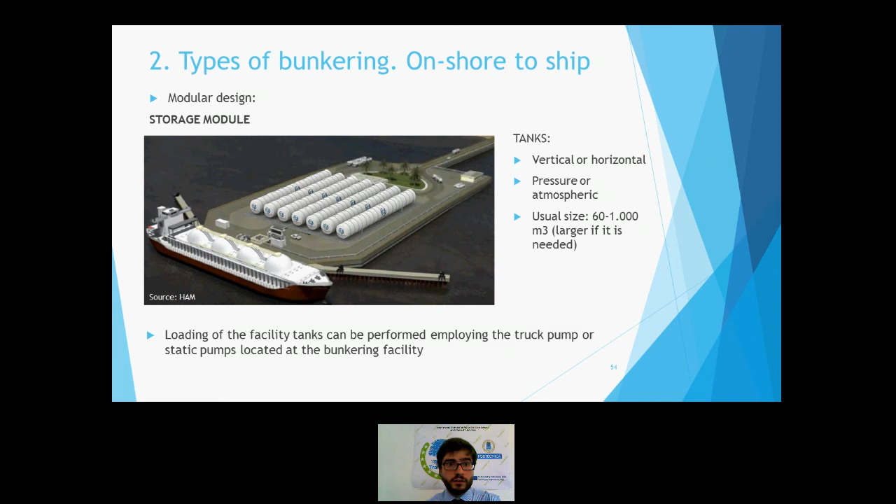Basically, there are two kinds of cryogenic pumps employed in this kind of facilities. The first is centrifugal cryogenic pumps, and the second one is centrifugal submerged pumps, whose output can vary from 40 to 200 cubic meters per hour, more or less.

These pumps usually are provided in skids, which include not only the pump but also the valves associated with it, its instrumentation, and its electrical installation. This is what we call plug and play devices, meaning you only set the skid there, and all you have to do is connect it with the correct pipes and wires.

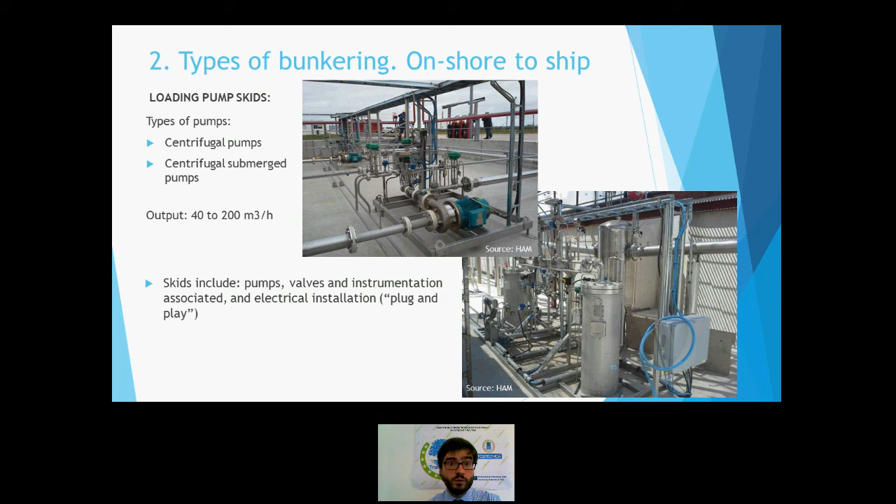And finally, the loading module, which can consist of manual cryogenic hoses or loading arms, which can be mechanical or automatic. These three pictures show the three kinds of loading devices. The first one is flexible cryogenic hoses. The second one is an automatic loading arm, and the third one is a mechanical manual loading arm.

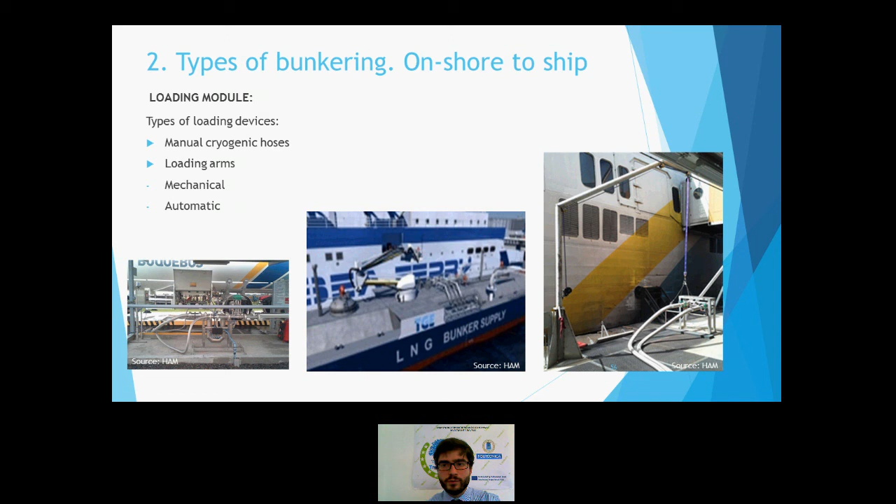And to see a practical case, we will look at the Buquebus project. It was performed in Argentina. The ferry is the Francisco, which is owned by Buquebus. It covers the route between Buenos Aires and Montevideo twice a day.

The project scope, and this is maybe the most interesting feature of this project, covered not only the bunkering facilities but also the liquefaction plant constructed to provide the LNG to the facility. It is property of Buquebus. So from the Argentinian gas network, it is liquefied in a liquefaction plant.

Then it is stored at cryogenic tanks, transferred by means of centrifugal pumps. Then from there, road trucks are loaded, and these road trucks transport the LNG from the liquefaction plant to the docks, where bunkering is performed by means of a flexible hose and a mechanical arm.

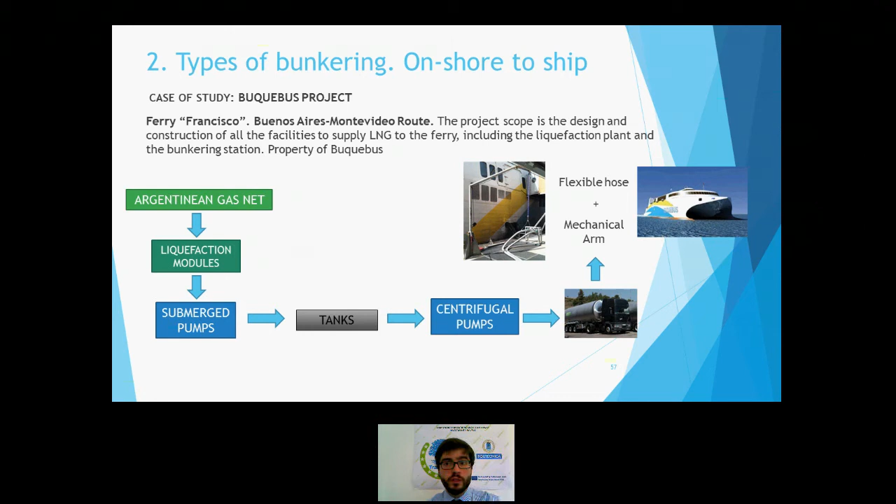The ferry has capacity for 1,000 people and 150 vehicles. As I said, it covers the route between Buenos Aires and Montevideo twice a day. Its consumption is 80 cubic meters per trip, which makes 160 cubic meters per day, which is exactly the capacity of the liquefaction plant.

This LNG is transported to the dock by means of road trucks. 4 daily trips are required. And the project was the 2014 winner of the Black Diamond Award by Zeus Intelligence.

In these two pictures, you can see in this one the liquefaction plant, and in this one the storage part of the same plant. These are the two tanks located there.

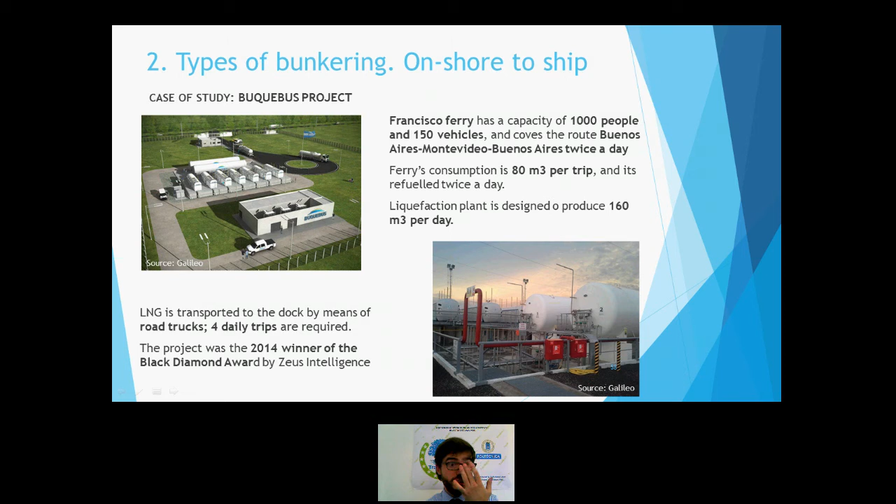And finally, the last bunkering system, called ship-to-ship. This means that the consumer ship is fueled from a bunkering ship, which is loaded either from an onshore facility or directly from road trucks.

So this implies two transfer operations. The first one is from the truck or the onshore facility to the bunkering ship, and the second is from the bunkering ship to the ship that it actually fuels. Its main advantage is that large consumer ships can be fueled offshore from small ports due to the reduced volume of the bunkering ship.

But there are still very few projects operating with this.

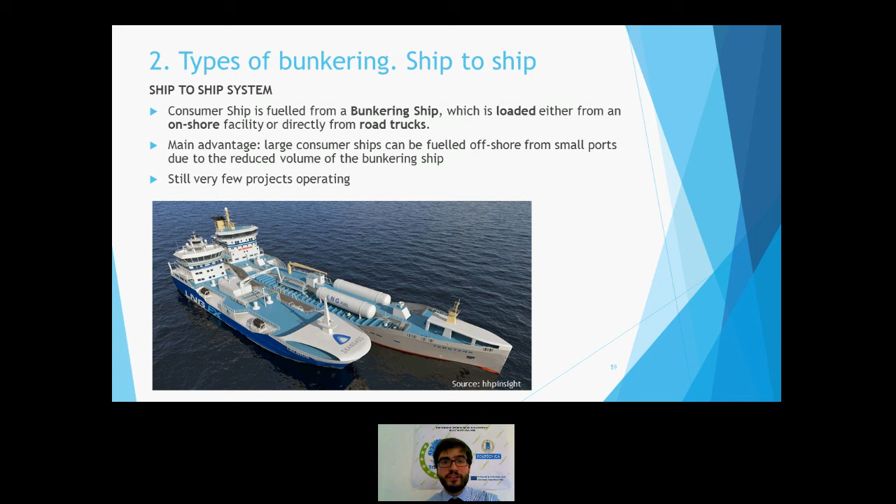So the different kinds of ship-to-ship systems, from the most complex to the most simple. The first one would take 5 steps. The LNG from the storage plant must be transferred to a road truck. The road truck transports it from the storage plant to an onshore bunkering facility. And there, from this bunkering facility, the bunkering ship is loaded. And then finally, the bunkering ship provides LNG to the consumer ship.

The second one is where the bunkering ship is loaded from road trucks directly. So the LNG comes from the storage plant to the docks by means of road trucks. There, directly from the road truck, it is transferred to the bunkering ship, and then the bunkering ship provides the LNG to the consumer.

And the most simple, which only implies 3 steps: the LNG comes from a storage plant directly, it goes directly to a bunkering ship, and there the bunkering ship provides the LNG to the consumer ship.